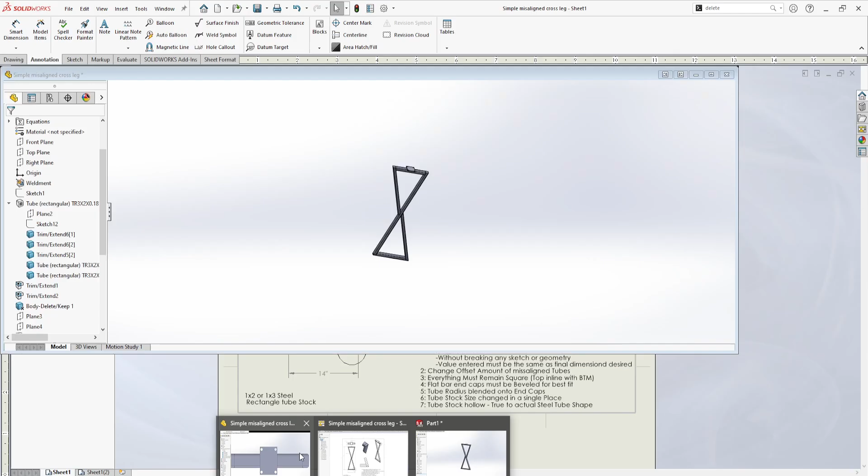That wraps up the modeling portion of this real-world CAD challenge. It is a pretty reasonable demonstration of some of the stuff that you'll actually have to be able to figure out when working with weldments and welders in general.

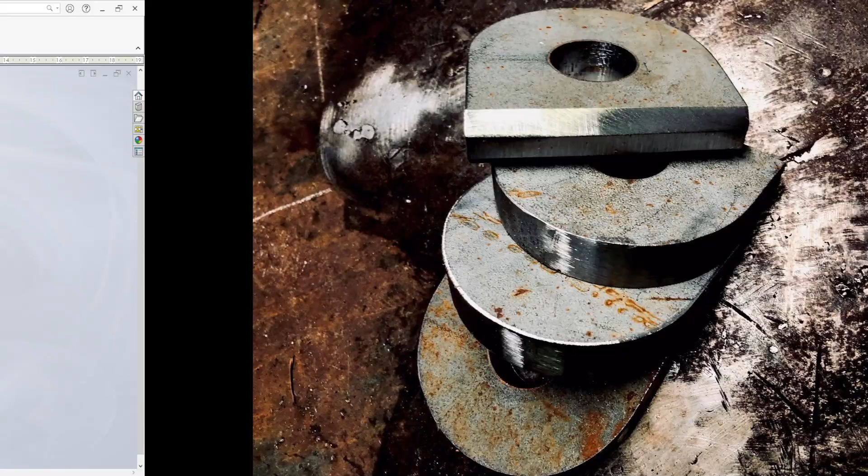And if we hop back into our drawing, we can see, so I actually went and made this leg. So I broke up the assembly into individual components. In order to do that, you can go to drawing, or you can go up here. Let's grab a front view. So what you can do is if you click this, you can do select bodies and select a body. And now you have just that single piece in the CAD file.

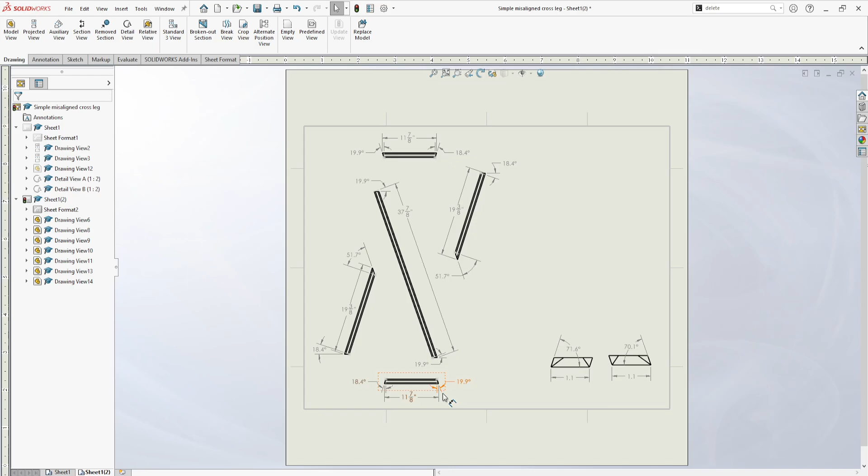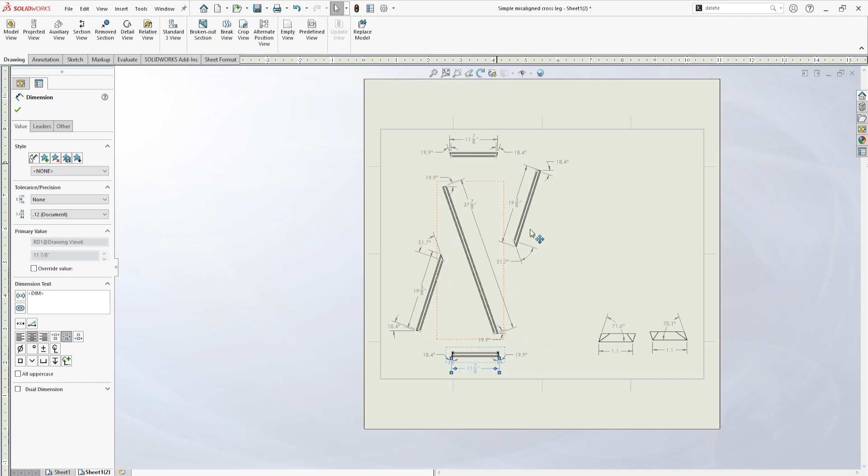And then I also did that for all the other pieces. So these are all full front views that I just selected individual bodies of so that I can dimension each piece individually start to finish. Because when you go to start making this, you want to see this angle and the length on an individual piece so that you can see what you actually have to make. If it was all dimensioned in a single thing, it starts to get extremely messy and hard to interpret. Breaking it up makes it a lot nicer.

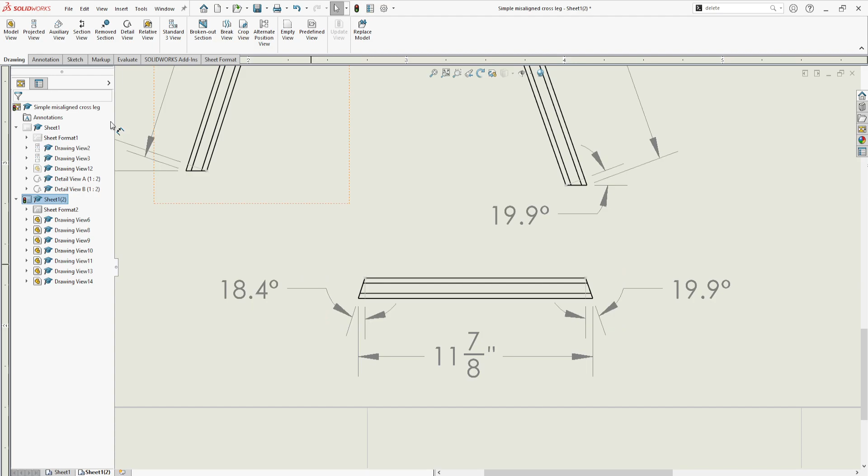One other thing that can make fabricating something like this nicer is how I do my angles. So if we look at some bandsaws, with the blade being 90 degrees to this fence, that's what most bandsaws will call 0 degrees. So in CAD, 90 degrees would be considered straight. So if we go to pull an angle here, on this dimension, normally you would get 71 degrees, 71.6. So instead of making it so that on the shop floor you have to calculate what this angle is, I like to add in a line.

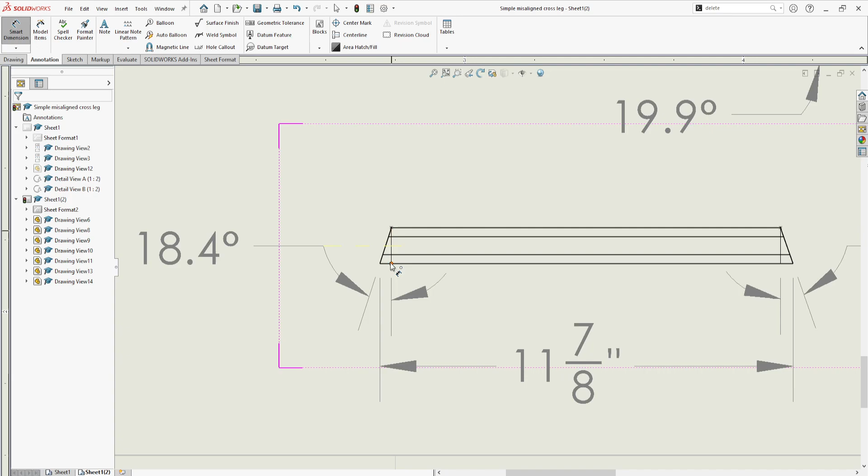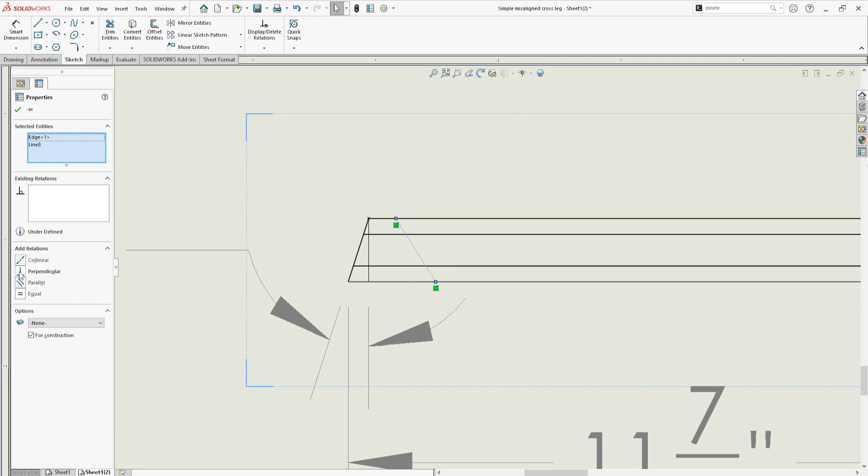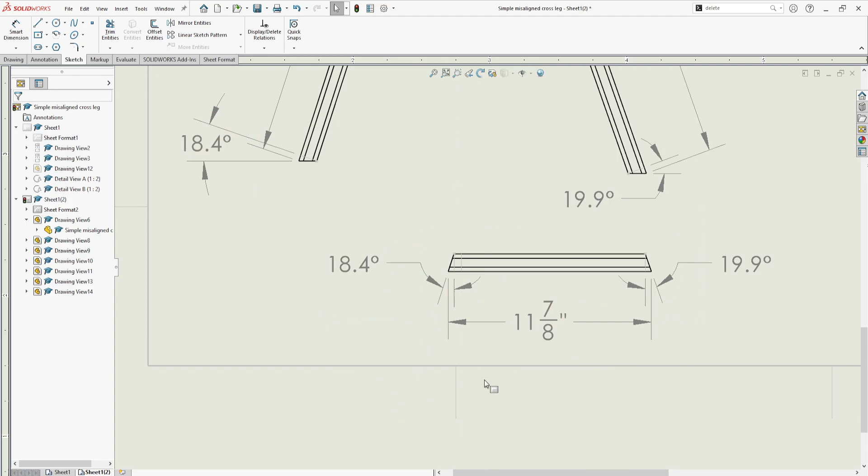And how I add those lines in is I grab a center line and I go from this point down. Let's just pretend this is over here. And then I click this one, and I click this, and I say to make it perpendicular. And then I can grab my dimension from this vertical face to this so that the welder or fabricator can actually see the number of degrees the saw needs to move in a certain direction. That alleviates a lot of math on the shop floor and saves potential errors and also time.

We can go ahead and delete that guy out of there. So I do that for each one of the angles. So when you're going to actually set the saw, these are the degrees that you're actually going to use. There's no math involved.

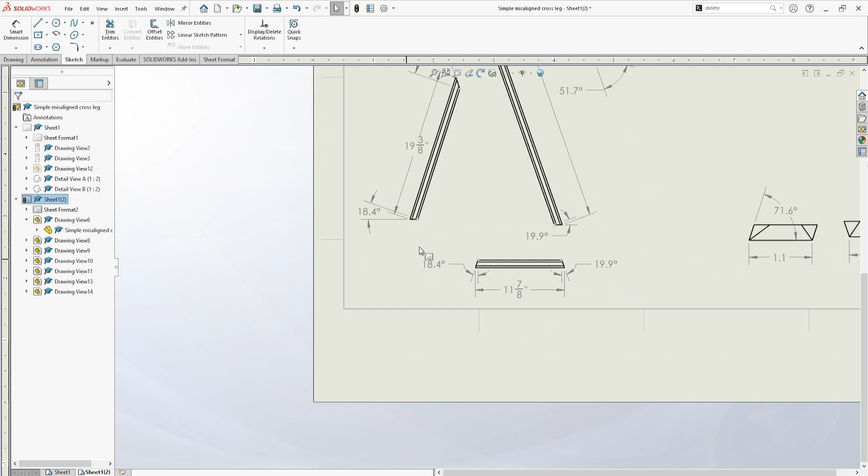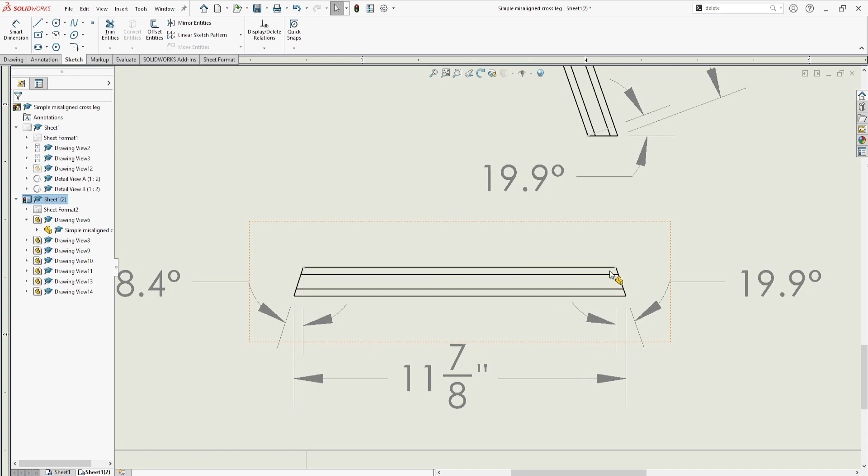And then the other thing, when making a cut on a bandsaw, you have to lay out the lines. So most of the time, if you have a piece like this, it's nice to lay it out long to long. You don't want to come into this point. It's very hard to measure if you're going from this line to up here. When you have a miter piece with the angles both going into each other and complementing each other, that's not so much a problem. On these vertical pieces, however, we have the bevel going this way on one side and the same way on the other side.

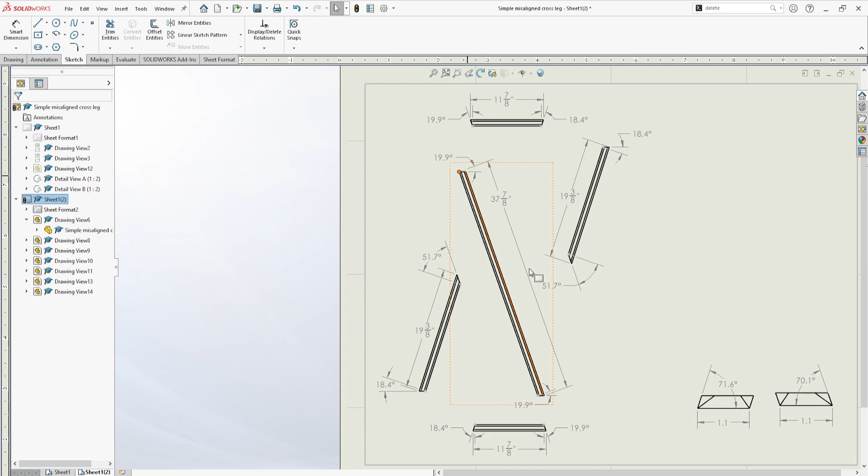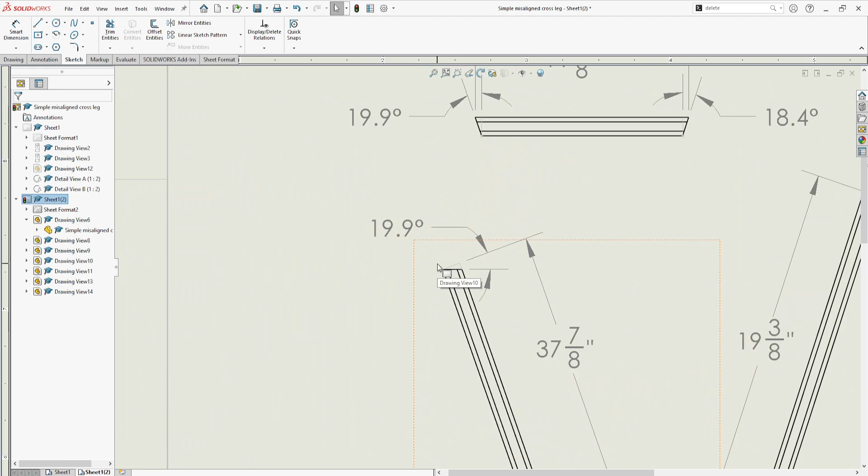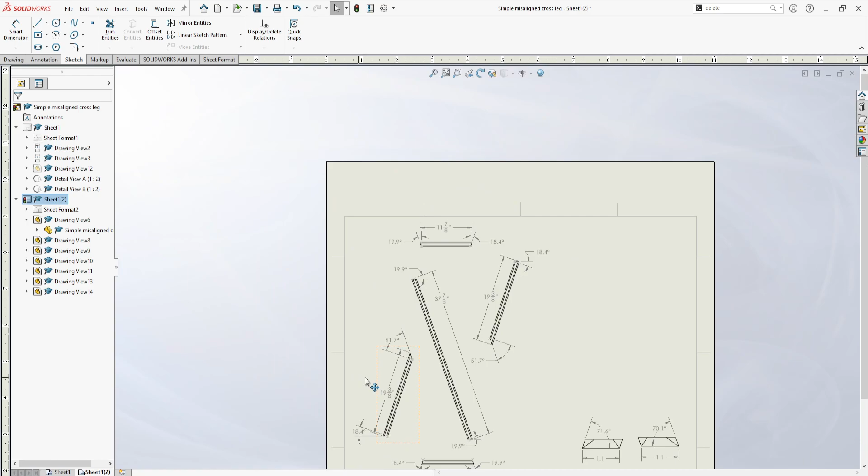So it makes it a lot easier to accurately measure this if you pull a small line up to dimension from. That way you can do the long to long measurement, and when you go to scribe your line, you'll just scribe from this back face, which makes it a lot easier to fabricate. I think that's all for the fabrication tips. Yep, so always try to go long to long if possible, and don't dimension a long to a short. It's a lot harder to be precise with that.

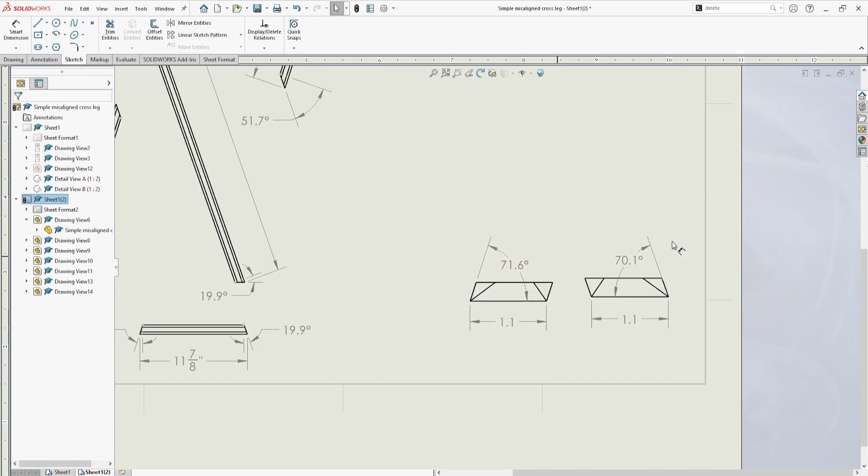Other than that, I think that concludes this drawing. You can also see these end caps ended up being different angles. The larger this bottom one gets, the more different these ones are. But I believe this is concluded. So that was the Real World CAD Challenge Misaligned Leg. I hope you guys had fun building it.